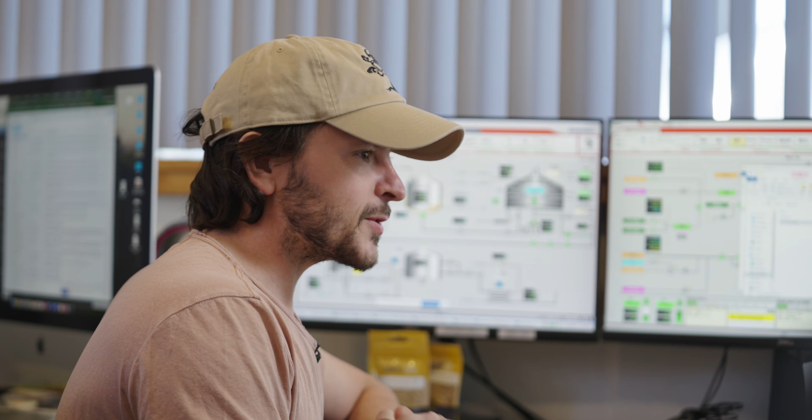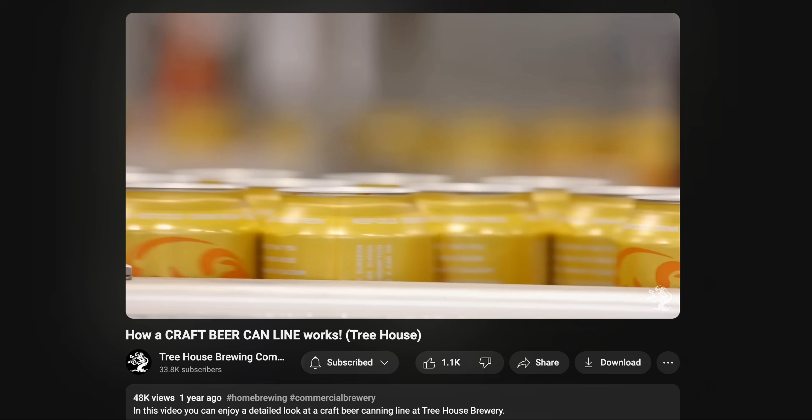It's been a little while since we've been here on the brew deck and we've talked brewing equipment, so we're excited to get back into this. If this is your first time here, we've made several videos about the brewery, starting with a behind the scenes brewhouse tour, a cellar tour, a packaging line tour, a warehouse tour. We've shown you guys all this equipment on a grand, broad scale.

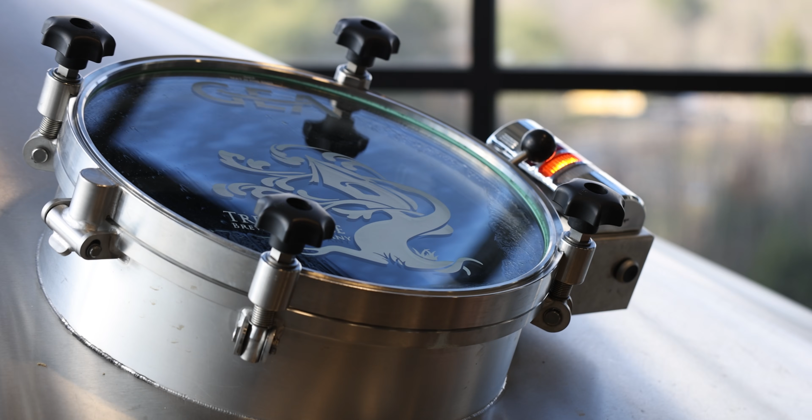And in this video, I want to take you guys behind the scenes in terms of how this equipment works, how we modify it, exactly how precise it is, and how we make a recipe on this incredible semi-automated equipment. So I'm not going to waste much time in the intro. Let's dive right in and see what it looks like.

So what you're seeing on screen right now is our GUI. It's our graphical user interface. So what you're seeing is a translation of all of the sensors and equipment that we have out on the floor so that we can manipulate all of the variables here on the brew house. For this video, I'm going to create a brand new recipe.

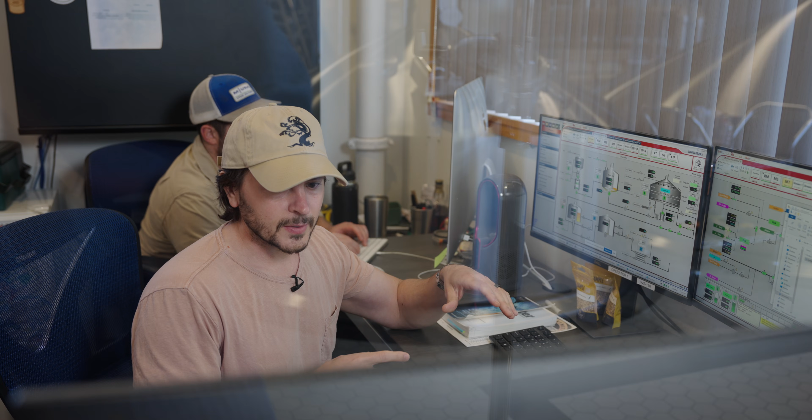And a recipe on this scale is not the way that you think about a recipe at home. It's not necessarily the things that go into making the beer. It's telling the brew house what you want it to do as a batch makes its way through the brew house. First and foremost, you have what's called your procedure.

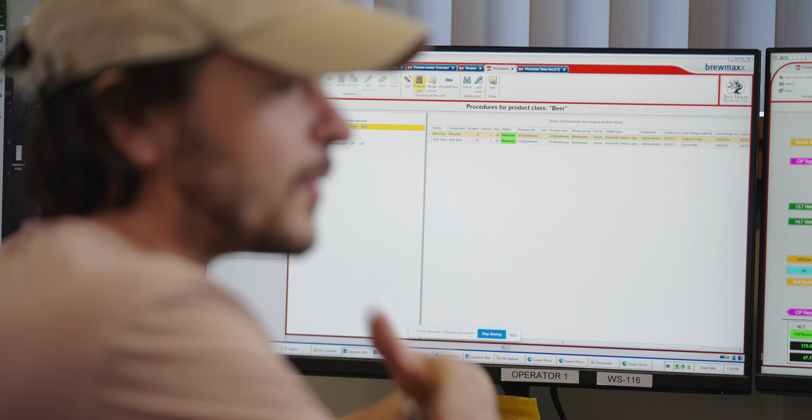So over here on the left, if you click on procedures, you'll see that we have a CIP procedure and a beer procedure. And for today's video, we're going to work with the beer procedure because we're talking about making a beer recipe. In terms of how this works, you can also make a clean in place recipe, which tells the brew house, the automated equipment, how to go about cleaning our equipment.

You have two classifications here on this particular brewing setup. And if you've watched previous videos, you'll know that all of this has been customized specifically for our brewing needs. I think you guys are going to be blown away with how many variables you can adjust and how many things you can tweak in the brewing process.

On a more manual setup, you will have far less control than you have on a semi-automated setup like this. And the beauty of it is we can interact with this brew house and change variables at any step of the process with a great amount of precision, as you guys will soon see.

Every recipe has a hierarchy, and the hierarchy starts with what's called the procedure. And the procedure is essentially a set of automated commands that run a batch through the brew house from start to finish. A recipe is modifying that procedure, that set procedure, and changing the variables as a batch makes its way through the brew house.

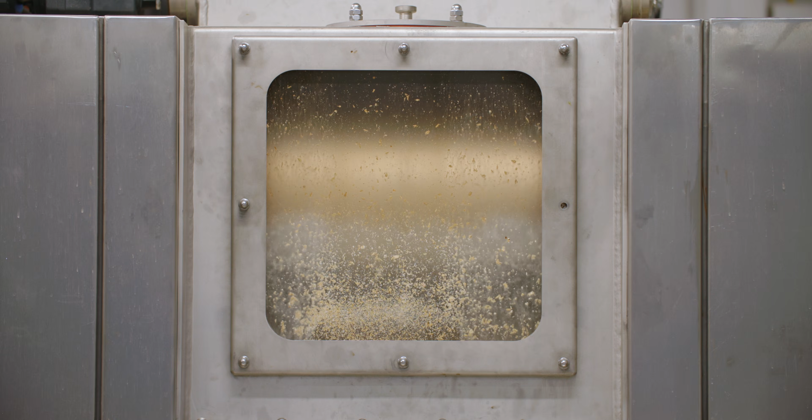Each brew house vessel has what's called a sequence. So our mill has a sequence, our malt silos have a sequence, our mash mixer has a sequence, lauter tun has a sequence, wort kettle, whirlpool, and then our wort chiller. All of those modules have a specific set of steps that take a batch of beer through the brew house. And a recipe lets you dial in all those details with a great deal of precision.

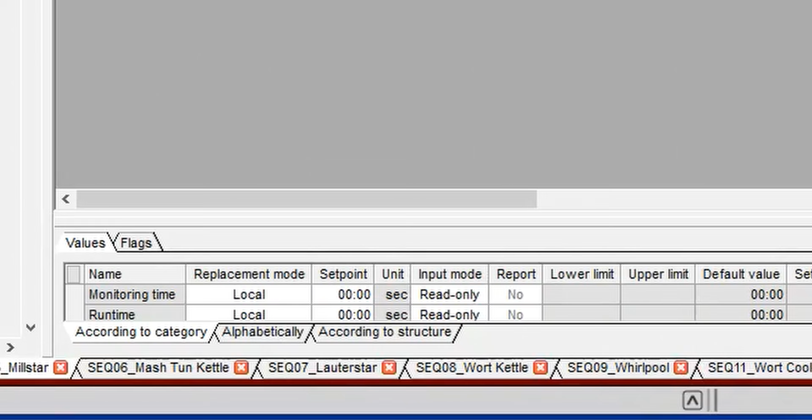So first thing I want to show you guys here is a procedure. So I'm going to click on brew line, and as I dive in here, you will be able to see all of the modules here that I just discussed. At the bottom, we have the malt hopper, the malt transport, the mill, mash tun, lauter tun, wort kettle, whirlpool, etc. And as I drill down into these specific modules, you'll see the types of control you can have in your procedure. First, I'll click on the Millstar.

And on the left here is your sequence. From top to bottom, you have a start step, a ready step, start crushing rollers, pre-steeping, milling, post-steeping, post-milling, rinsing with rollers. All of those things happen in sequence as your batch makes its way on through. That procedure is just for the Millstar.

And if you jump into the mash tun kettle, you'll see that there's other parameters that are valuable as well. You have your hot water rinse, which will preheat your mash tun. Of course, you have your mashing in step. You have your heating up step, which means you're either doing a step mash or you're using the heat to achieve your mash temperature. So if you come in low at 150 and your set point's 152, this mash mixer has a steam jacket that will bring you up to your purported mash temperature.

Moving on from that, we have other heating up steps, which we may or may not use depending on the beer. For example, in Hefeweizen, we'll do a many step mash with a ferulic acid rest. We'll step it up to another temperature and another temperature before mashing off.

So the important thing that I want to impart upon you guys for this brew house specifically, and on a commercial scale, we have a high degree of flexibility in terms of how we mash and the temperatures that we achieve. I won't linger too long on this section. For this video, I'll keep it relatively simple.

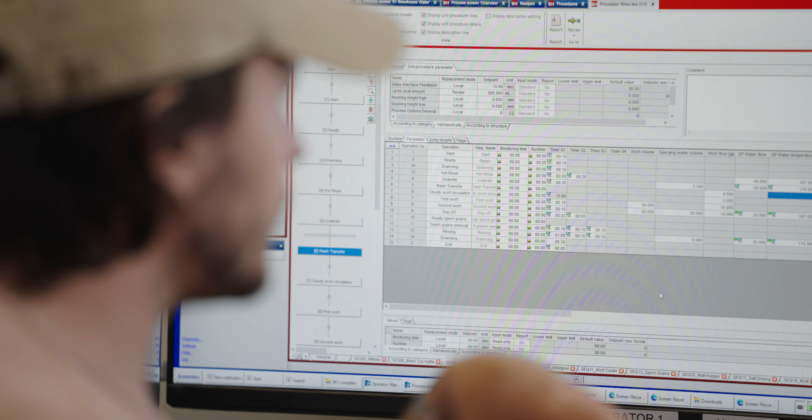So now, hopefully you guys understand the procedure versus a recipe. A procedure is a base set of things that happen as a beer runs through the brew house that can be overridden by parameters that you create within a brew house recipe. The important thing to remember is that as we're making a batch, we can adjust any of these variables on the fly. We can actuate any valve that we want.

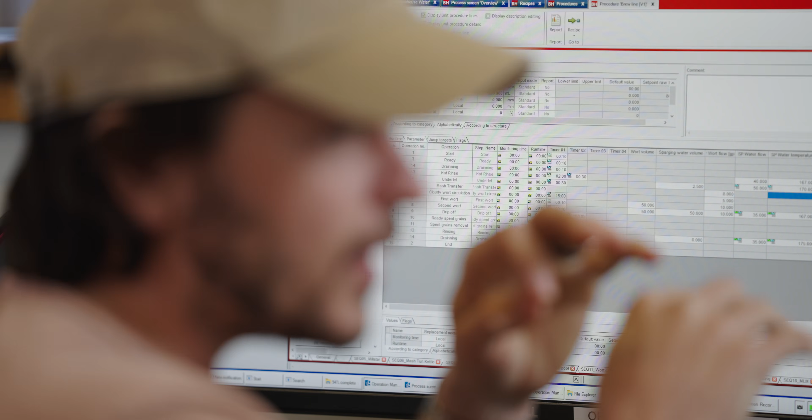We actually have articulating valves. They're called modulating valves. So if we need to accelerate a flow rate or reduce a flow rate based on grain bed pressure, it's measured as millimeters water column. We can speed up or slow down the runoff either by adjusting a variable frequency drive pump or articulating a valve, or a combination of both.

If you're a home brewer or a commercial brewer with manual equipment, you'll often do those things by adjusting a valve by hand and with your sight. On a brew house like this, we have sensors on everything, so we have precision data and feedback in terms of everything we're doing.

And before I dive into the recipe aspect, I want to show you guys really quickly what I mean with some data that we log in real time in our lauter tun. We're actually running a batch of Daze through the brew house right now. And before we dive into a recipe, I'm gonna take a look at that really quickly.

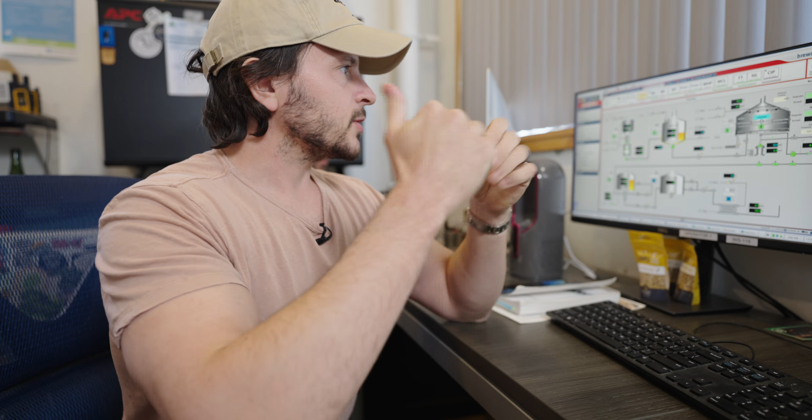So here on our process screens, you can see our mill, our mash mixer, our lauter tun's currently in a deep cut, which means the pressure got too high, and risking a stuck mash, it will actually go down and cut the grain, recirculate to clarity before running off again, which just concluded. And if we dive into the lauter tun screen, you'll see this little button right here. We have all kinds of data in terms of what's happening in your lauter tun.

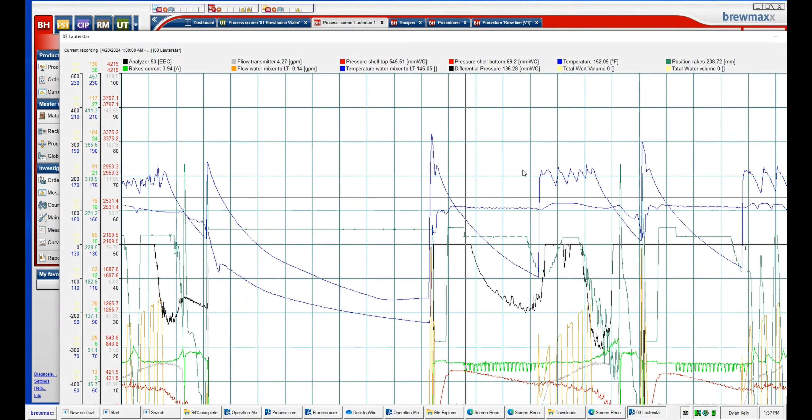So if we get to the wort kettle, or if we have difficulty with our lauter and we're not sure why, we can open up this screen and we can see the trends and the details about a specific batch, temperatures, the wort clarity, the pressure, you name it. We have infinite troubleshooting capabilities with all of this data and feedback that this brew house collects.

So the next thing that I want to do is make a recipe. You guys will see a number of recipes here on the screen right now. It's obviously not all of our beers, and the important thing to know about these recipes is that they're just ideas about how a beer runs through the brew house. So water volumes, temperatures, sparging volumes in a double IPA will generally be about the same depending on grain volume, different temperatures for mash, and salt adjustments and things like that. Those are all things that we adjust on the fly.

The general principles surrounding the brew of an IPA or a double IPA or a Pilsner are relatively similar. So these instances cost us a ton of money to maintain on the server. So we try to limit the amount of actual recipes that we utilize on an ongoing basis, because honestly, we brew quite manually with each successive batch.

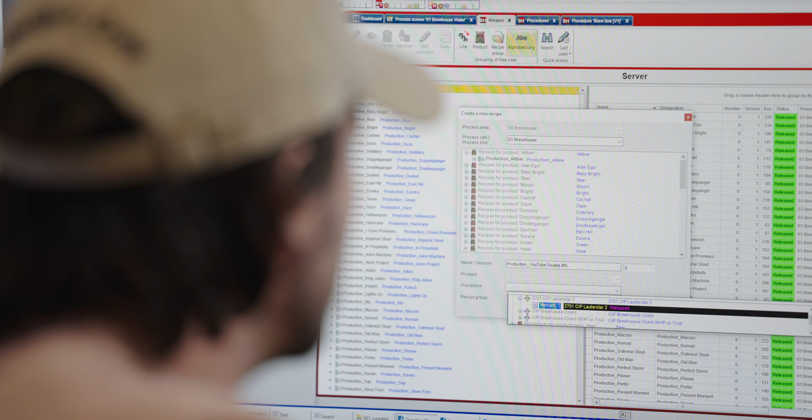Go to my recipe files, click on create. We're gonna call this production YouTube double IPA. Procedure, now remember, we're modifying this procedure with this recipe, so we have to make sure we select the correct procedure to modify. And in this case, we will be selecting the brew line, make sure that populates, and then the product is gonna be called YouTube Special. And then I'm gonna click on OK.

And I'm gonna be greeted by this amazing screen that has all of the things that I have said to the procedure matter to making Treehouse beer. So the procedure's identified, it's populated this procedure with all the base aspects. And now for the recipe, we can go through and make modifications. This process would take me probably 25 or 30 minutes.

And for the sake of the length of this video, I'm gonna run through this relatively quickly and just point out a few things that we can modify before saying that this recipe is good to go. So we're making the YouTube double IPA. We want it to be a little bit sweeter. We want to mash at, let's say, 156.

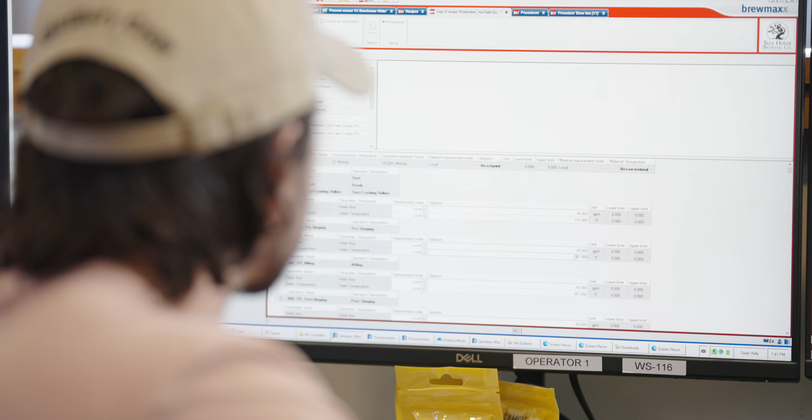Based on what we know about our strike temperature versus where the temperature of the grain settles, for a beer at 156, we'll mash in around 168 to 170. So now, as I start the crushing rollers, I'm gonna set them a little bit higher because I know that they're cold. 172 to get our crushing rollers lubricated and moving, make sure they're working well. The pre-steeping step is a step where the wet mill fills with grain and the grain is saturated with water. That's another step where I'll make the temperature a little bit higher.

Depending on whether or not we're following another batch or if we're brewing the first batch of the day, you will always make tiny adjustments. But again, because we're trying to mash high, I will err on the side of caution and say 175 for the pre-steeping step. Now that we move into the milling step, I'm gonna say 170.

Now again, it's important to remember that when this is happening in real time, I can actually jump over to his screen right now because John's mashing in a batch and show you that as this happens in real time, this inlet temperature over here is my strike temperature. So right now he's striking at 172 and the grain is going into the mash mixer at 156.

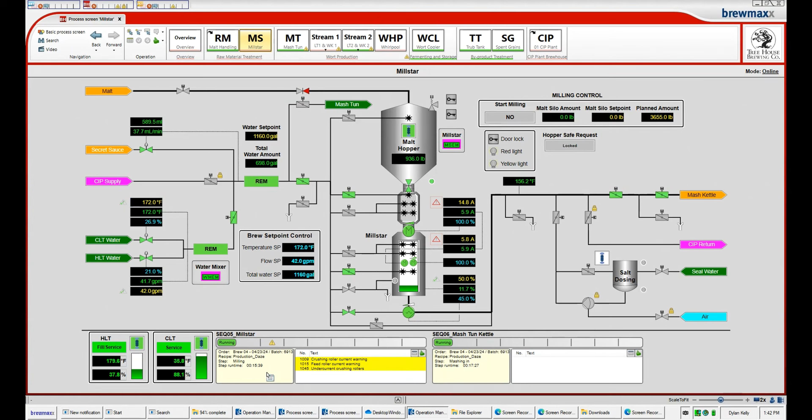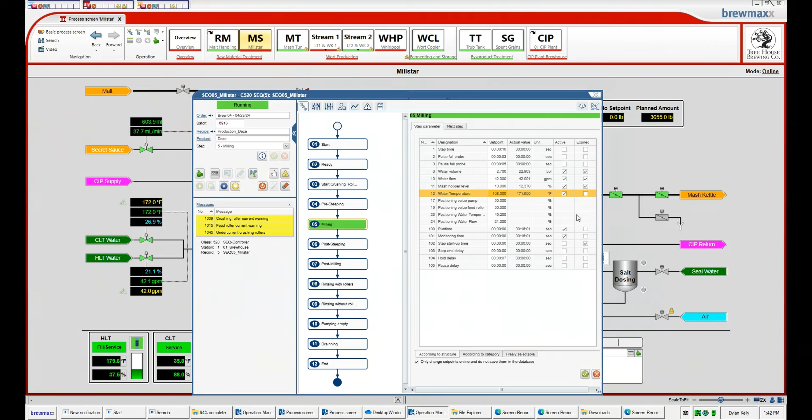And if I need to, I can actually click on this. I can click into the procedure, open this screen up, and change my water temperature coming in. Right now the set point's 172. It's going in at 156, which is what he wants, but I can change that to 168 and then hit OK. I'm not gonna do that to him because he's nailing his mash temperature right now, but I want you guys to understand exactly how precise this is because it's incredible.

Let's head back into the recipe where we had been playing around there before. I can make any change that I want. Am I salt dosing? Yes or no? What's my total mash water requirement? What is my grain to water ratio going to be? That's a simple calculation based on what you're trying to achieve, whether it's 1.1 or 1.4 or 1.6. I could do that quick math and then populate my water volume prior to mashing in. But again, if things are going wrong or if things are moving too quickly, make those changes on the fly.

Of course, I have my mash rest temperatures. I've got 4 options for mash rest, so I can have like a protein rest, a sac rest, a mash out, beta amylase rest. The options are unlimited here. I can set my time, I can set my temperature for each mash, how slowly the temperature ramps up. So if I'm going from 145 to 155, I can do that over 5 minutes, I can do it over 30 minutes. The mash rest step also has an enormous amount of flexibility.

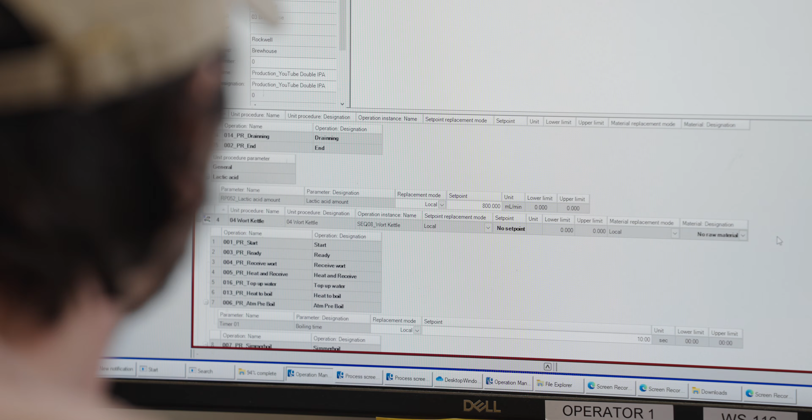All right, so the next thing I want to show you guys is the lauter tun step. On a brewhouse like this, the lauter tun is the most complex, advanced software precision that we have on the brewhouse. Clarity, timing, temperature, volume of water, number of sparges, where you decide to deep cut if your grain bed pressure becomes too high. All of those things are highly, highly adjustable. And during commissioning of this brewhouse, that was actually one of the things that was the most difficult for us to dial in.

On the screen here, you'll see the cloudy wort. And cloudy wort's a professional term for what you know as the Vorlauf. It's where you recirculate wort from the bottom of the grain back on top to clarify it. Here, our timing is usually lengthier than the standard, because we want to make sure we have perfectly clear wort before we run off, so we avoid any polyphenolic extraction in our wort.

Of course, the next parameter that we have is time for first wort and time for second wort. So on a brewhouse like this, first wort is the stuff that you run off before you start adding water to the top. So you run that beautiful sweet wort off first, and that usually takes a while. And then once you start adding hot water to the top, we call that second wort. And that's where you can start to speed things up and the majority of your runoff takes place as you rinse that beautiful sweet sugar water from the grain and into the wort kettle.

This next section here obviously needs to be adjusted, but basically you have a calculation of how much wort you're going to extract in your first wort, and you'll have a percentage of loss.

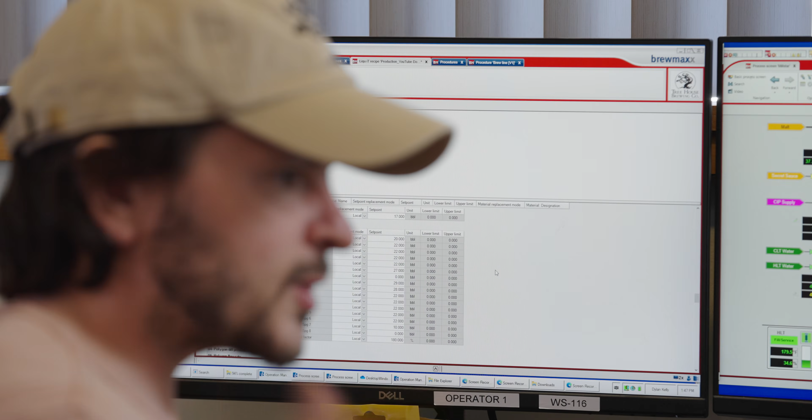And this particular thing, over a series of 4, 5, 6, 7, 8 water spargings, lets us dial in the number that we want to ensure that we wind up exactly where we want to be. And this here has taken years and years of trial and error to find the best efficiency to get the best wort quality without leaving anything behind.

Man, there's so many things here. This video could be like 5 hours long because there's so much here. Every variable is modifiable. You know, where we decide to deep cut or where we decide to stop deep cutting at the end of the runoff to take the chance on whether or not we get a stuck runoff or we waste a little bit of time waiting for that deep cut. You can have that be 85% of runoff, 95% of runoff. Again, we've learned our values over the years and we're pretty confident where they are now.

Of course, malt transport amount is part of the recipe, but this is one that we'll modify on an ongoing basis. You know, for our YouTube special double IPA, we'll probably add 4,200 pounds of 2-row. And between like dextrin malts and specialty malts, to get a 8 to 8.5% double IPA, we're probably using 4,800 pounds of total grain or something thereabouts. For reasons related to quality, we're not always the most efficient brewery in the world because we aren't worried about efficiency, we're worried about wort quality. So when you crunch our efficiency numbers, you might be surprised.

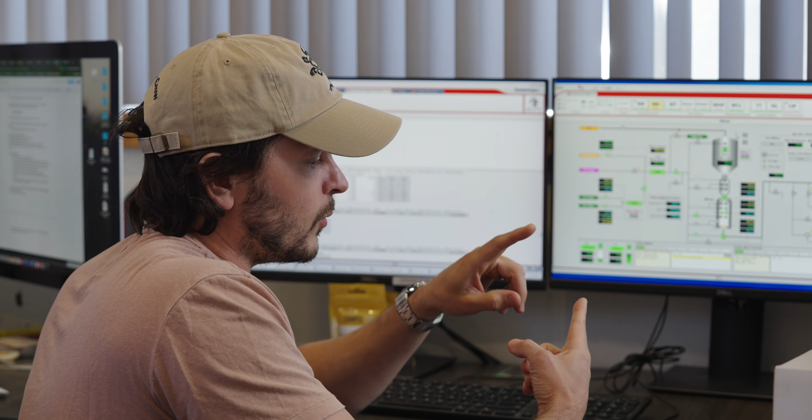All right, before I move on to showing you guys some specific brewing process screens, hopefully you've gotten the idea here. Wort kettle boiling time, wort kettle boiling temperature, steam pressure to the boil, meaning like time it takes to heat the boil. All of these things are adjustable on this brew house with an extraordinary amount of capability. You can make those adjustments either in the procedure or in the recipe to have exactly what you want for the beer that you want. But it's really important to remember that all of these variables are controllable in real time. In fact, even more so than we have control over the recipe by looking at the process screens.

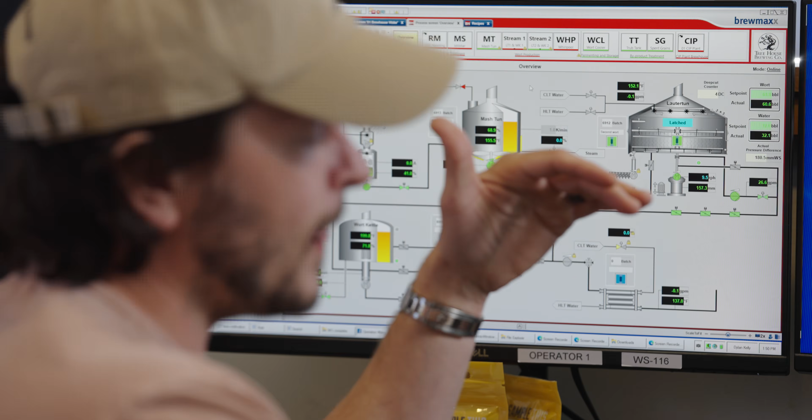So here we have a grand overview of our process screens, and I want to dive into one of these module screens to show you guys the next level of precision that we have. So we have the procedure, we have the recipe, and then we have real-time brewing. And here at Tree House, this brew house has been outfitted for that real-time brewing to be the most important thing. So the operator behind the screen can drill into any sequence at any time and make even more precise modifications based on conditions in the field, based on malt quality, hop quality, etc.

So this is the process screen overview. You can see the entire process from start to finish. You have the mill, the mash mixer, the lauter, wort kettle, the whirlpool, and then of course the heat exchanger. So we will dive into the lauter tun and see what we got. This is probably a lot to take in, but down here at the bottom, you have the mash tun, the lauter star, and the wort kettle. And that is part of your sequence. And your sequence is controlled by your procedure.

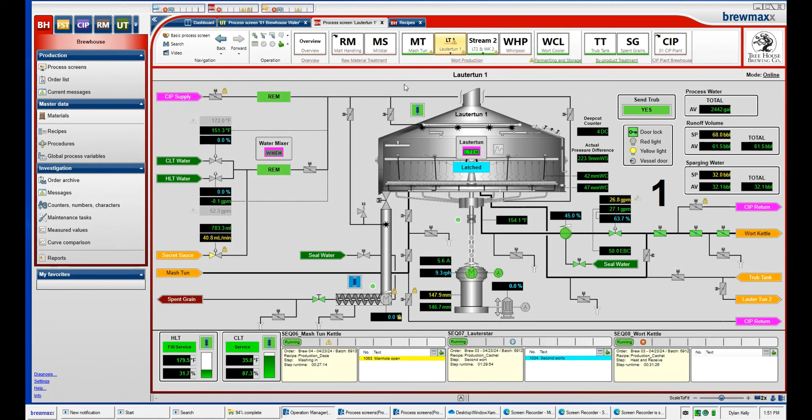So as this brew is making its way through the brew house, it's happening automatically until it runs into a step that tells it to stop. And we have guardrails that we've installed to tell it to stop, but we also are at the wheel at all times. So it's like an automated car where we kind of grab the wheel and pull it out of autopilot when we need to take control.

So this runoff is happening in real time right now. It's a batch of Cachet moving through the brew house. Wort is going into the wort kettle at 27 gallons per minute. We've had 4 deep cuts, which isn't particularly ideal, and things here are going pretty well. So one example of something that I might do to make an adjustment to this batch if we were running into trouble is I might say, okay, the actual pressure difference within the lauter is gaining pressure too quickly. The best way to combat that is to slow the runoff speed down. So I want you guys to pay close attention to what happens.

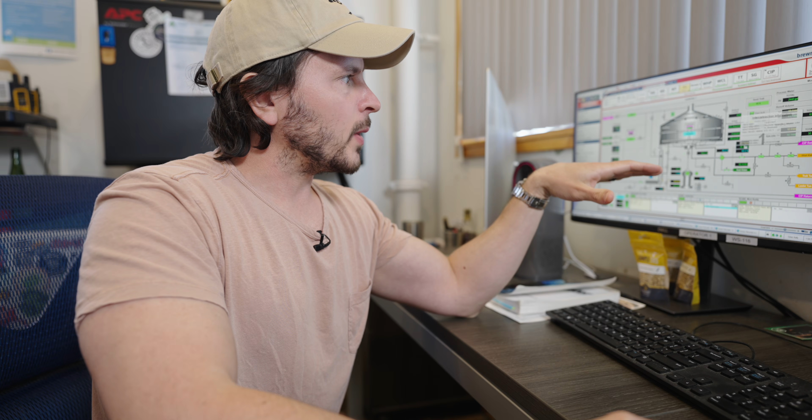The set point is 26 gallons per minute. It's running at 25.3 and this modulating valve is adjusting. So if I go into the sequence, if I drill down here and I open this up and I find the step timer, I can actually make a change in real time that will affect that runoff rate.

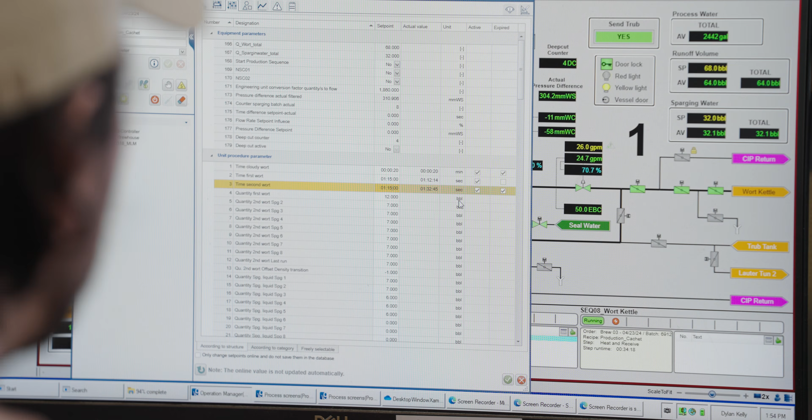So the time of second wort is currently set at 1 hour and 15 minutes. If I slow this down, let's take 1 hour and 45 minutes. For this step, what's going to happen is the brew house is automatically going to adjust our runoff rate, reduce our pressure, and give us a more stable runoff.

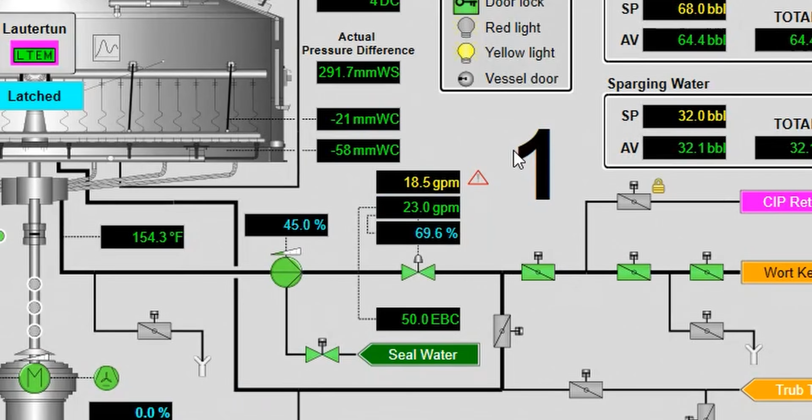Once the brew house makes that calculation, now the set point's 19.3 gallons per minute, and it's going to magically adjust. So you can see that modulating valve, it's closing. It's closing. Now it's at 68%, 67%, 66%, 65%. And the value on the bottom is your actual flow rate and your value on the top is the set point. So by making that manual change on the fly, I am adjusting what's happening in real time.

And this is just one example of a manual operator override that we use on every batch, every day, every minute as beers run through this brew house. So you might think that being at a big scale like Tree House or having this big semi-automated brew house somehow takes away the precision of brewing. But the reality is it actually makes it substantially easier to adjust the variables with a high degree of precision that are really important to brewing.

If you were doing this with a valve, it would be a visual thing. You'd say, oh, it looks like it's running a little bit slower now, but I have objective data that tells me that by making a key variable change, I have slowed down the flow rate. Now I'm gonna go back in here. I just did that as an example. I'm gonna increase that number back up again, and we're gonna watch that pump and that modulating valve open up to let that wort travel through a little bit faster.

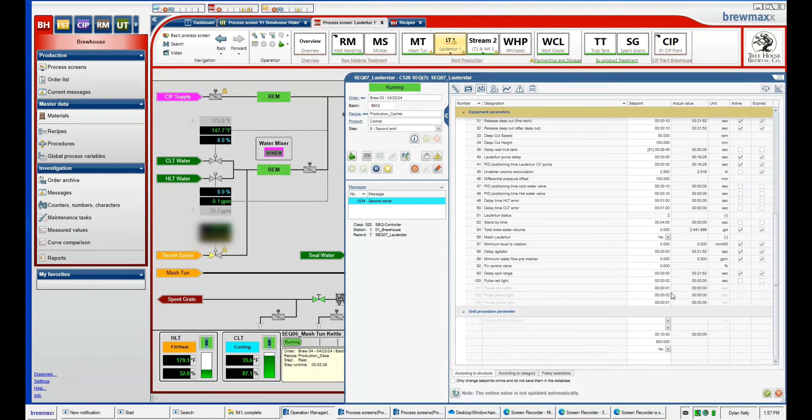One thing you have to be really careful for is that sometimes when you make changes, the brewhouse will overcompensate because a modulating valve is very difficult to write an algorithm for. So anytime you do make adjustments, you want to make small ones, wait and see what happens, and then make another small adjustment. I went up to 1 hour and 45 minutes for that step. I'm going to go back to 1 hour and a half and split the difference. Again, because I don't want to do anything too drastic.

This is the 7th year we've had this brewhouse. Literally the longest brewhouse by far that Tree House has had our hands on. We're approaching our 7,000th batch, and being able to make this level of adjustment is still like the coolest thing to me. So again, the flow rate was set to 18 gallons per minute automatically based on the brewhouse's calculation of how long it would take for that volume of wort to reach the wort kettle.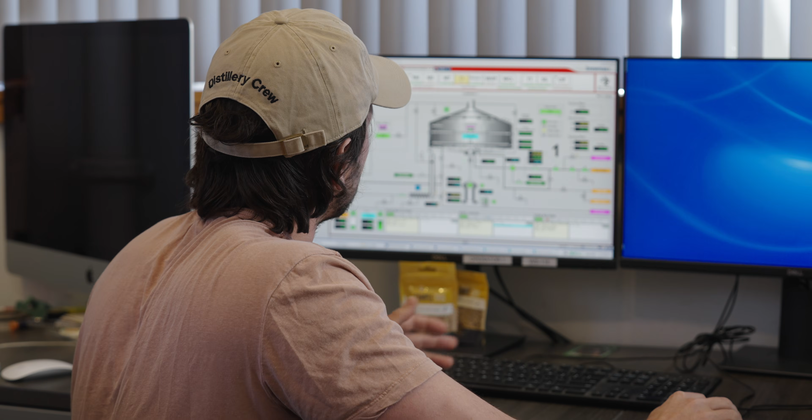So once I make this change, I can go back in and I can see that the set point has now climbed 3 gallons per minute. The modulating valve is going to start to open. It was at 68, now it's at 72, and it's slowly and carefully adjusting that flow rate by modulating this valve, only allowing a certain amount of wort through. So my set point is 20.8. Right now it's running at 18 gallons per minute, and as that modulating valve opens, that speed is going to increase.

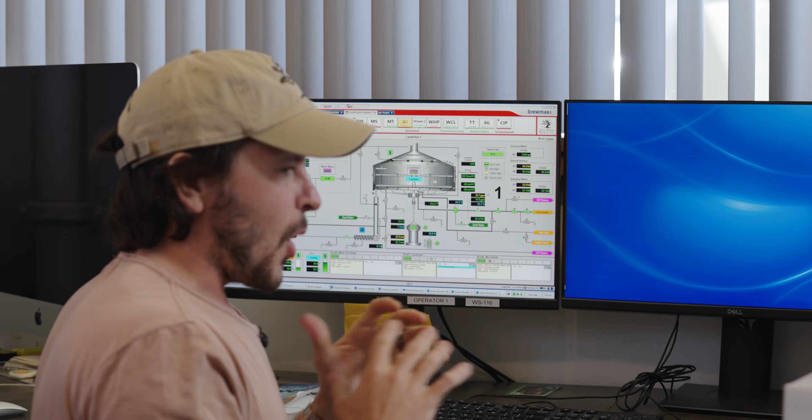Overwhelmingly complex video, overwhelmingly complex subject. Admittedly, I got in a bit over my head thinking that this would be a straightforward video, and now I'm realizing you and I could talk about this for hours, but hopefully you got the sense of how our brewhouse works and how we've outfitted it to be as precise as humanly possible to let us adjust all the variables that are necessary.

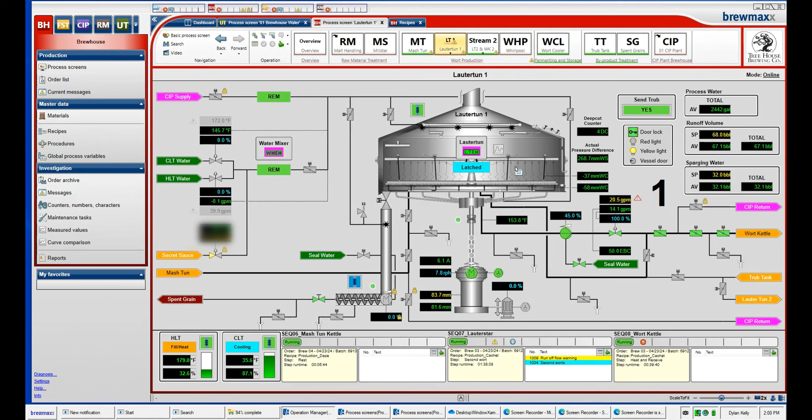The last thing that I want you to remember is that this brewhouse works like this. Procedure hierarchy, that's a beer running through the brewhouse on a set procedure. The recipe is a thing that modifies all of the variables of the procedure. The sequence is what happens when you hit go on a brew. And then for everything on this brewhouse, we have a manual override. So all of your temperatures, flow rates, modulating valves, you name it, we can adjust it in real time on the fly to suit our needs and ensure that every wort that comes out of this brewhouse is absolutely impeccable.